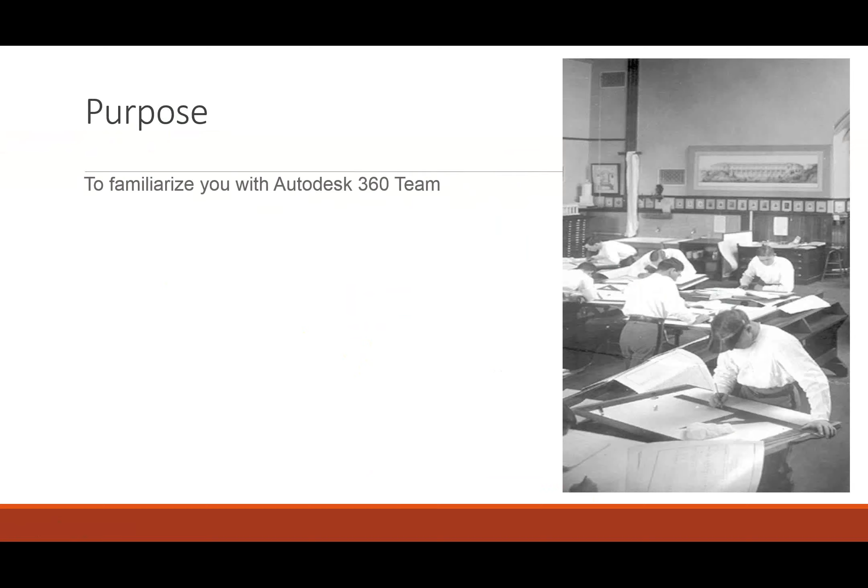Now, the purpose, well stated in the name, is really to familiarize you with this Autodesk 360 Team, and to give you a better understanding about it. So that's our whole premise for this afternoon. From a timeline standpoint, we're only going to take an hour of your time, probably a little less, just going over the software, what it can do, capabilities, and we're going to get into a little Q&A session towards the end. As Mark mentioned, go ahead and ask some of those questions, and he'll try to answer those, or we'll save them towards the end as we get into it.

So first, what's what? What are we dealing with? What are we looking at? There's some confusion out there from a marketing or positioning standpoint, or just what people know and how things maybe change names or morph. So there's this basic thing people are used to calling just 360, which is some online storage or documentation you can put up in the cloud.

And there's also what people have heard of, 360 rendering or rendering in the cloud. That's an extension of some of these Revit tools. And then people hearing terms like the 360 cloud - what is that? Some documentation, some tools that let us store data in the cloud, invite people to do some basic collaboration. You may have also heard of something called A360 Revit collaboration - what is that? That's another extension of Revit into the cloud and collaboration, and I think one of the next coming up webinars will focus on that.

And then you've heard this new term, 360 team. So that's taking the premise of the 360 being in the cloud, collaborating, sharing information, and pulling it together for multiple projects and multiple team members. That's what we're really going to focus on and look at today. So from a comparison standpoint, it sounds like this 360 thing, but now you're calling it 360 team - what is that, and how do those all play together? What are we basically looking at here?

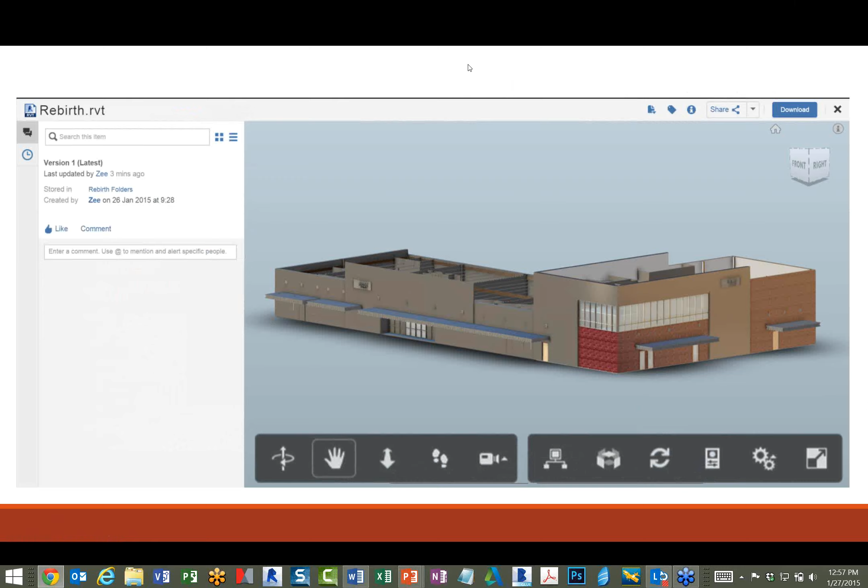Now, I have a little video I can show that I did some pre-recording, because sometimes things coming across the web have a challenge to it. At the same time, I'm going to try to open up that file as well. I'll give it a second here. Let me just jump to that, so we'll see if it comes through.

Here's just another piece while this other item is waiting to load: I can orientate to different views. You can see in the upper corner there, we have this cube that allows us to spin and to select different orientations and views. And you can see this is looking at the right side, whether that's north, south, east, or west. And I have this set up in a shaded view so I can see my building, the orientation, what's going on.

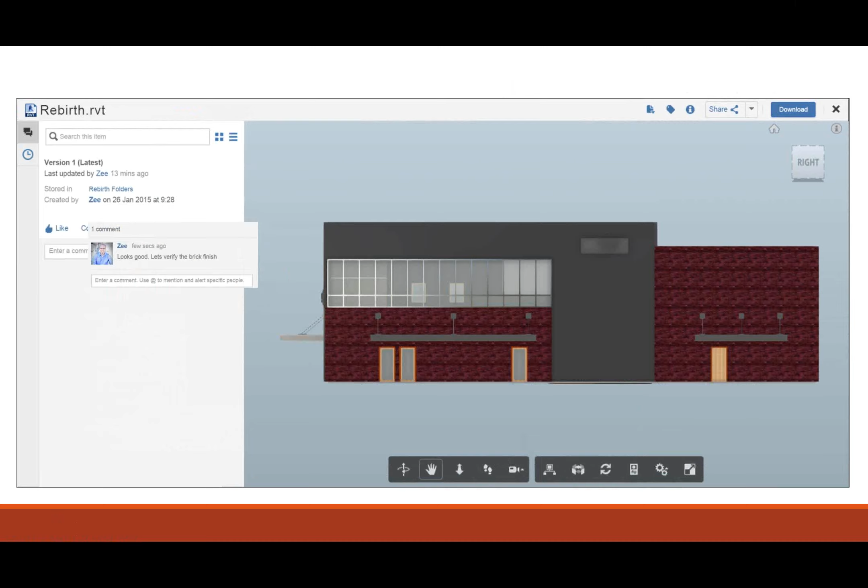But if I click on an object in here, I just select the wall, for example, it's going to bring up this listing of properties about that object, tell me some information about it. First of all, this is telling me the level it's associated with, the type of wall it is, the unconnected height with it.

So this is just publishing information from the Revit model itself, right? And so if we were changing the model, we'd want to republish that, if you will. But we're getting the ability to basically see what's going on with some different components. And I wanted to share this with you all.

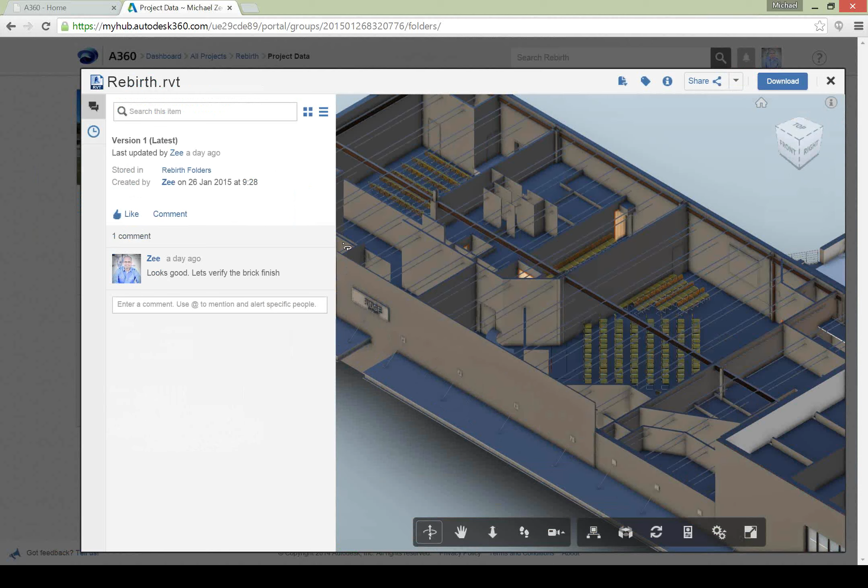Let me pull this across. This is a live view of the same project I've been showing you. Let me just maximize this so we can see a little bit better. So this is just full screen to be able to see this stuff. Sometimes the web takes a second to catch up, pushing this image across the wire, if you will. But here I can, like I said, basically select different elements,

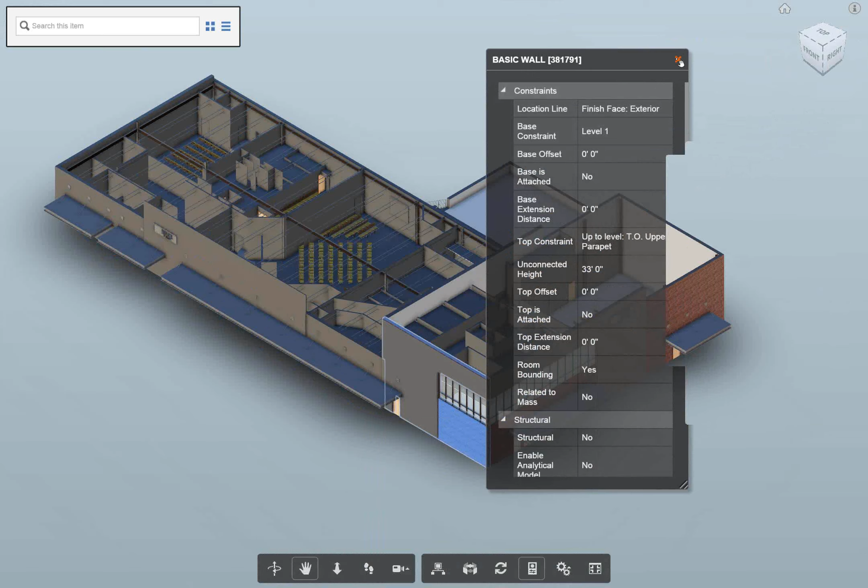making sure it's highlighted. I'm just selecting that wall in the upper corner here, right-clicking, giving me some information about it, but also then selecting that properties information I was just talking about. What else I thought was pretty unique about this is there's this explode tool in here, where I can take this slider and start to pull apart and expand out my building.

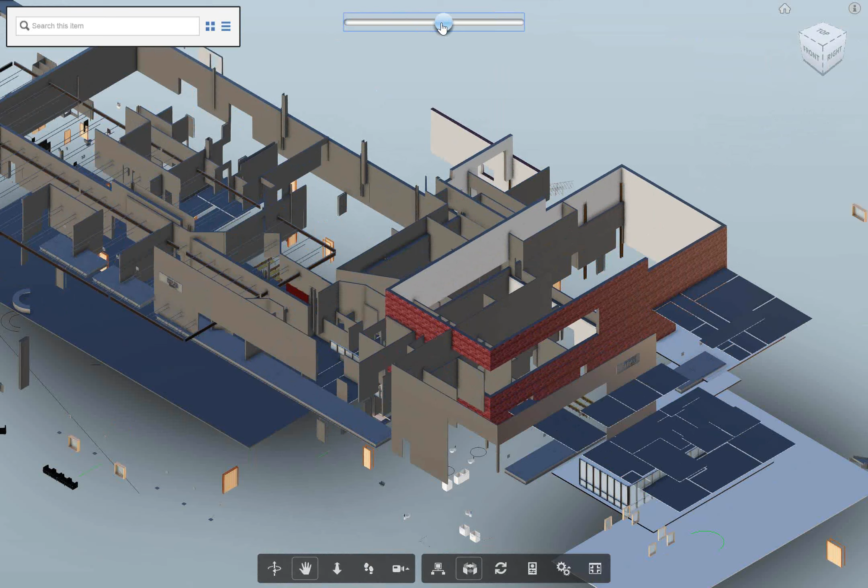I'm definitely going to let my view refresh and catch up with that, but I'm able to expand apart my building. And you might get to a point where it is totally exploded and looks like a deconstruction type thing. But what that allows me to do is really to see into this building and look at different stuff, and maybe come down here in this lower corner and select this door and get the properties about that, and it tells me some information.

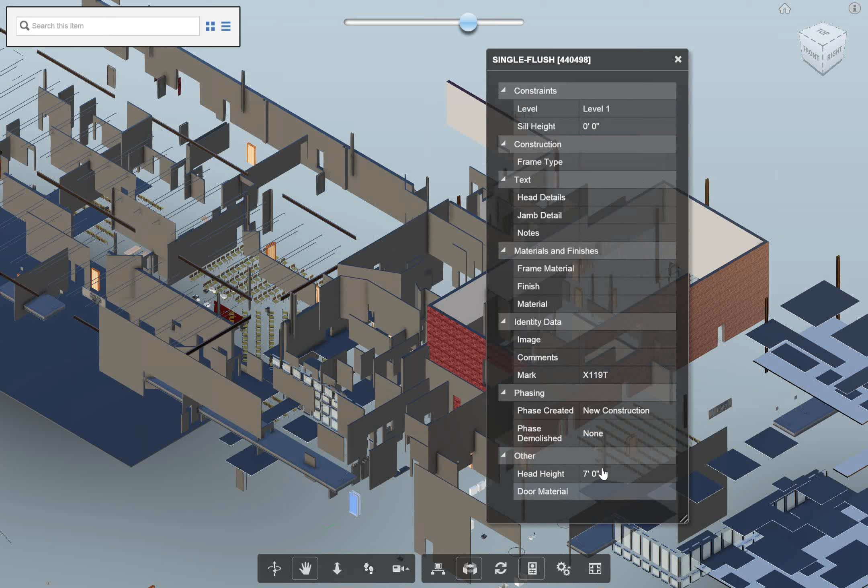It tells me the material, the frame type, the mark, that it's a new construction door, the head height, that kind of information associated with it, and basically pull the building all back together. So some different ways to view and to navigate in here. Again, doing some different spin orientation.

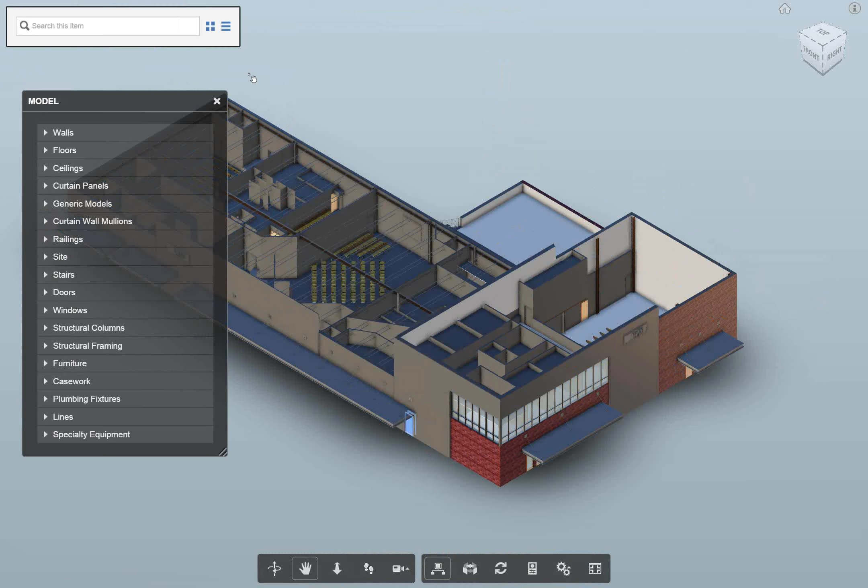And then also what we can do is pull up another overall model browser down here. It almost looks like a tree network sort of thing. But I can start to expand this out and look at what's involved in here. Just tell me all the walls. And again, this is all published from Revit, right? So if I said, well, tell me what has the basic walls in here? I've got to let the system catch up a little bit, but it's graying out everything else, but identifying what it's considering this basic wall type in here.

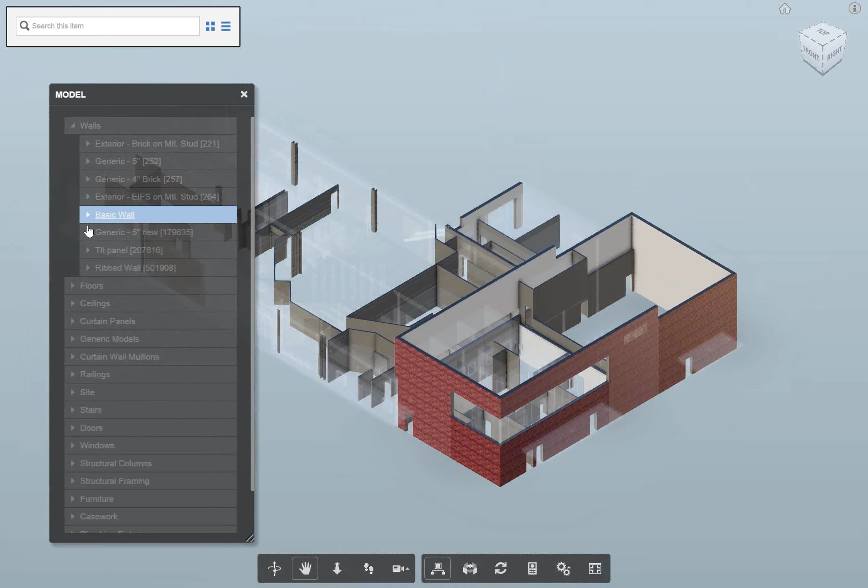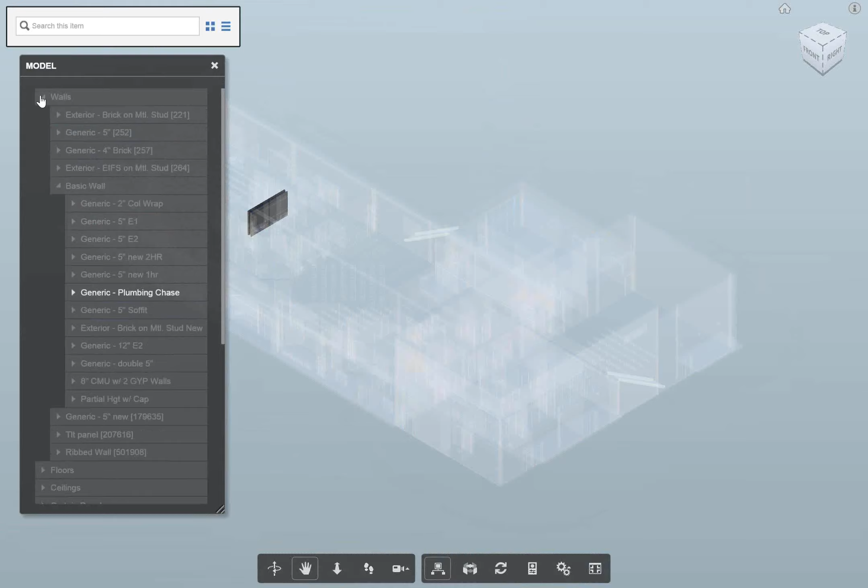Or here, for example, if I say basic walls, let me expand that out and say here's a plumbing chase wall. Just move this over, let the screen catch up. That wall is a basic wall category, and is a generic plumbing chase wall. So we can quickly identify that, get some information about it, maybe the properties we spoke about, or even coming into, here's some doors, show me some single flush doors.

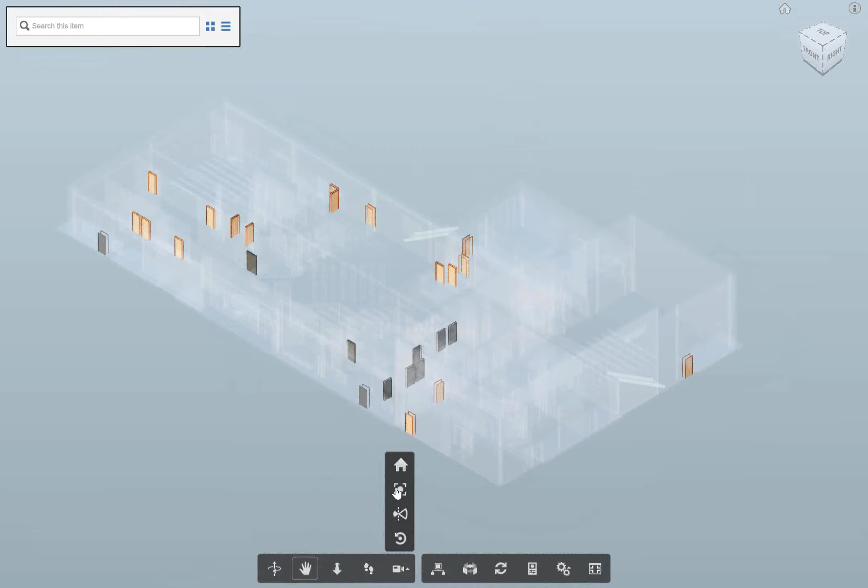Again, waiting for it to catch up. So here it's giving me some feedback, some data, if you will, about this, which is relatively easy to collect and see what's going on with the project itself. Now there's some other navigational tools in here to place some different cameras, zoom into some different areas, really navigate around this building to see what's going on and just explore and find out what's going on in there.

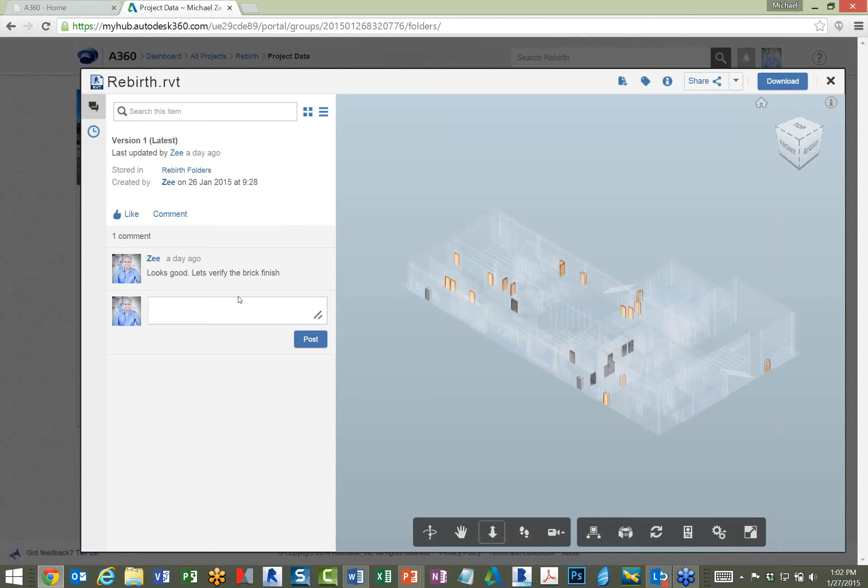And again, that's just a view within the model itself of what we have uploaded. But you can see there's actually some tools here to download this, maybe to share this out with some folks, or also just comment on here. I put a comment in here: looks good, let's verify the brick finish. So that's getting sent and notified to all members of the team, so we're able to track, verify, and see what's going on within our project overall. And when I close that, it brings me back to the model itself.

Now what I also did is upload some CAD-related files. We can't really ever get away from CAD completely. So this is about as live and real as you can get. I basically just clicked on that, and it's opening up the CAD model associated with that. This particular project had more of a design in CAD first, and it was built into a Revit model.

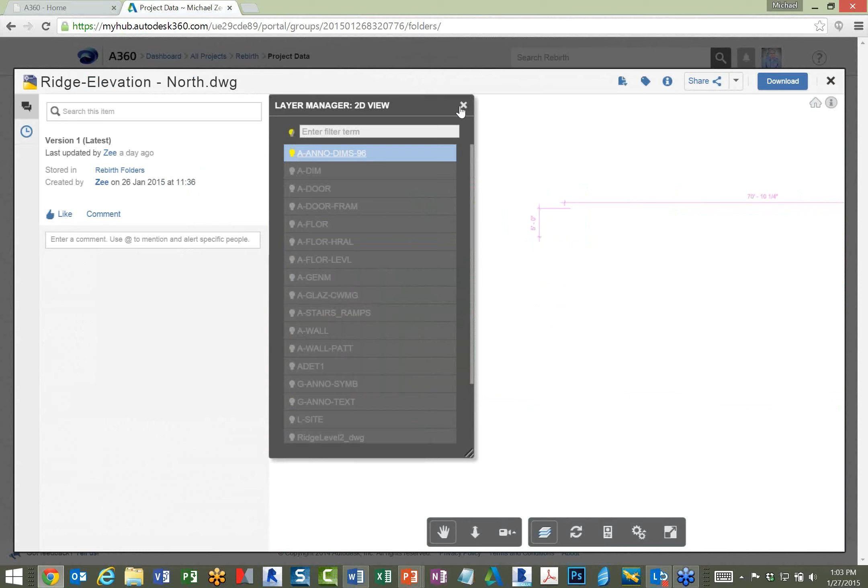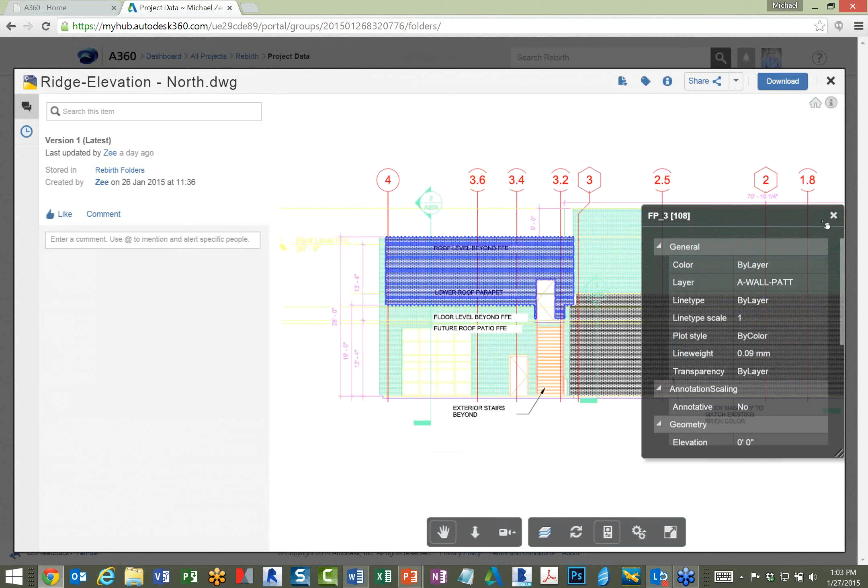But here you can see we can actually list out the different layers, turning on and off layers, identifying stuff, going through that whole series, turning on different elements, or reloading the overall model, or even getting into properties. So if I select this area, probably a hatched area, the properties panel is listing that out, telling me plot style, hatch pattern, that kind of stuff, which is great feedback because there's other file types we can use.

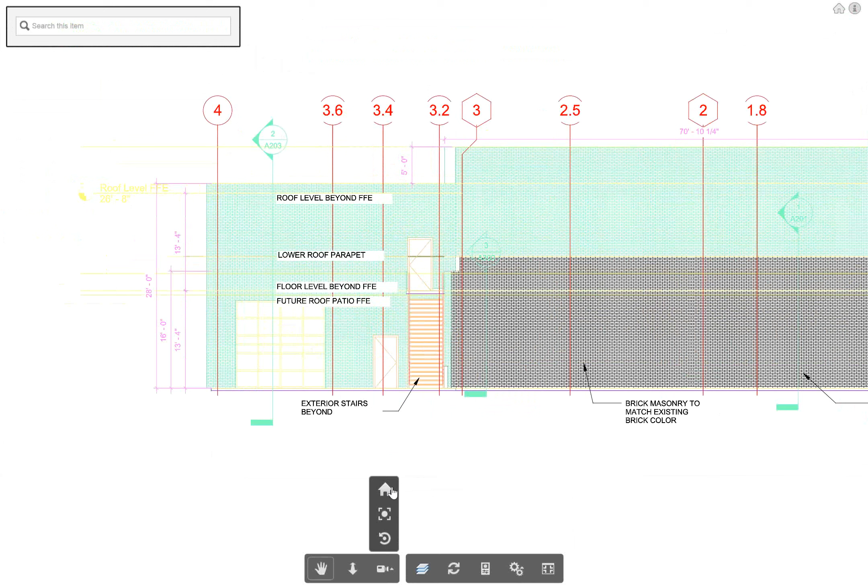It's not all just BIM-centric, and being able to refresh that, or even maximize it, gives me a better context in here. And again, some camera move related elements. So I really wanted to go through and show you some of those pieces so you can see what's going on. Let me just jump back over to here. So that was my little animation, but I would rather have shown you that live anyway.

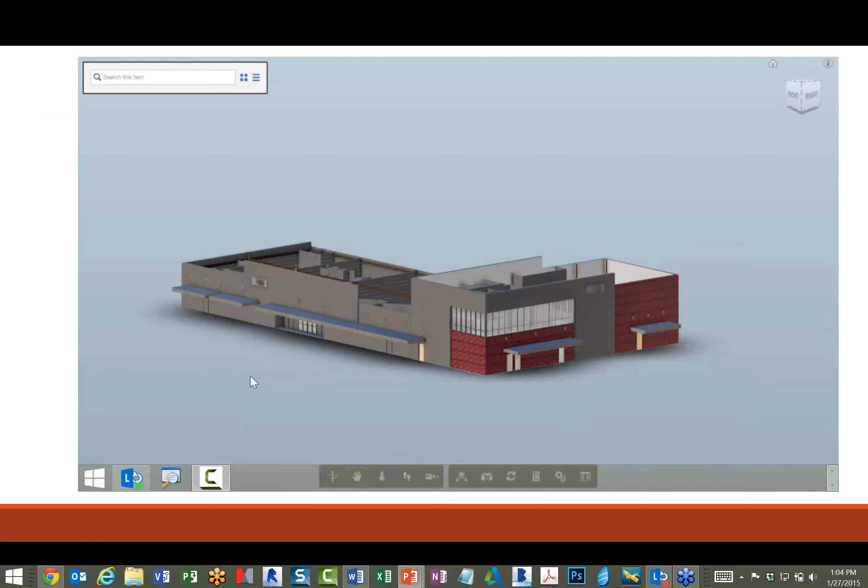So continuing with the big picture, what all the A360 Team can do for us, we look at these bigger buckets.

We're able to share the information. We're able to view it, again, in any 2D or 3D format that you saw we were able to show. But it can actually view 100 different file formats when we come into this. And so that really, I mean, probably everything you can imagine, but also giving us the ability to search and filter down and to dig into this information a little bit better. But overall, that big communication piece that we've been talking about.

Now, it is available on any device. Obviously, I'm running this through a computer, but it is the web-based portion of it. But we're able to use this entire thing to run the project, manage the team members wherever we are. So whether it's on any kind of device, an iPad sort of device, we can access that, which is really expanding this out.

So even thinking it's in the process of being built, you're out in the field, you're looking at this information, you're commenting, sharing, looking at stuff, and just keeping stuff coordinated. Or like in many cases, the design folks are in an office in another town and you're in another one, and you're able to keep information all coordinated and tied together.

And mentioning the any device thing or any file format, I mentioned the 100 different file formats. That's impressive. For one, that we can view not only the Revit model in this web-based viewer, but also the CAD version of the stuff and be able to zoom and pan and look around and make some commenting type stuff on there. That's essential and critical to this overall whole process.